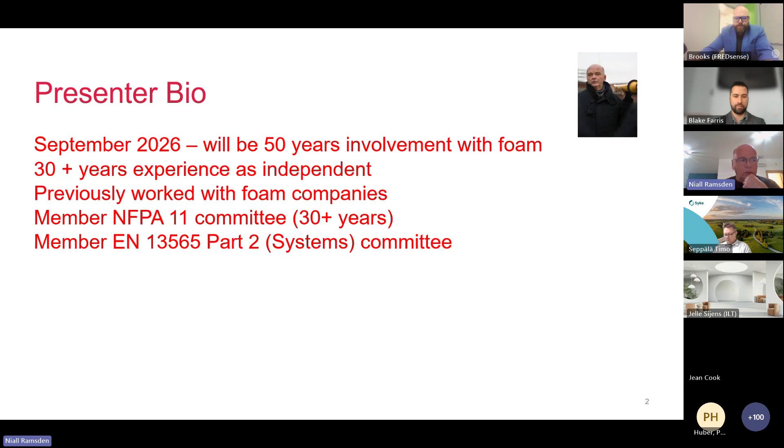One of the things I'm involved with right now is the NFPA Research Foundation Transition Roadmap. It's a working group of 4 people with help from other people sometimes as well, developing a transition roadmap guidance mainly aimed at municipal fire brigades. That's an ongoing thing, but I think we're just on phase 3, updating that as well.

One of the main issues though is a project called LASTFIRE, which is a group of around 20-25 international oil companies. All the big guys are there: ExxonMobil, Shell, BP, Total, Petronas, Saudi Aramco, all of these sort of companies who work together in developing best practice in storage tank fire hazard management. The last 5 or 6 years of that project has been focused almost entirely on the transition to PFAS-free foam.

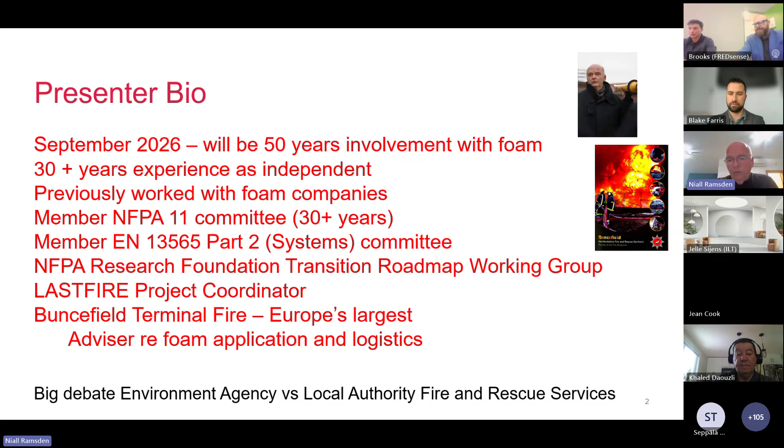It's not all just theoretical, because I was actually an advisor to one of Europe's biggest tank fires - some of you remember it, it's actually 20 years ago now, a terminal called Buncefield in the UK, about 23 tanks more or less simultaneously ignited, and I was very heavily involved there on the foam application and logistics. Interestingly enough, it was at that time this issue was just arising, and a lot of 3M foam was donated to the incident - people were glad to get rid of it. There was actually a big debate at the time between the Environment Agency in the UK and the local authority fire and rescue services who were tackling the fire, about whether they should actually use foam or just burn it out. In the end, it was really a political decision to use the foam, recognising that the public had to be made aware that you could actually manage such incidents.

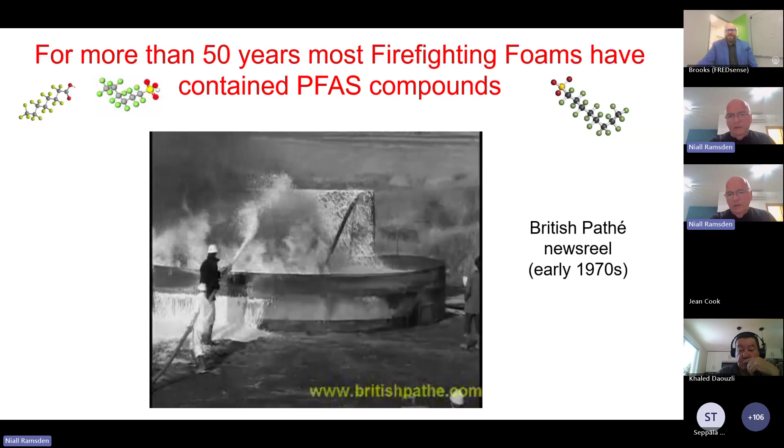So I'll show you this little Pathé News video from the 70s. This was probably one of the first introductions of PFAS containing foam in the early 70s.

I wasn't actually at that demonstration, but I do recognise some of the people in it. It was actually done by Angus Fire, and I recognise my boss a few years later from that incident. So it was from that demonstration - one of the first demonstrations, and it wasn't AFFF, as it's called. It's actually fluoroprotein foam. Sometimes we forget that PFAS compounds are used in more than just aqueous film-forming foam.

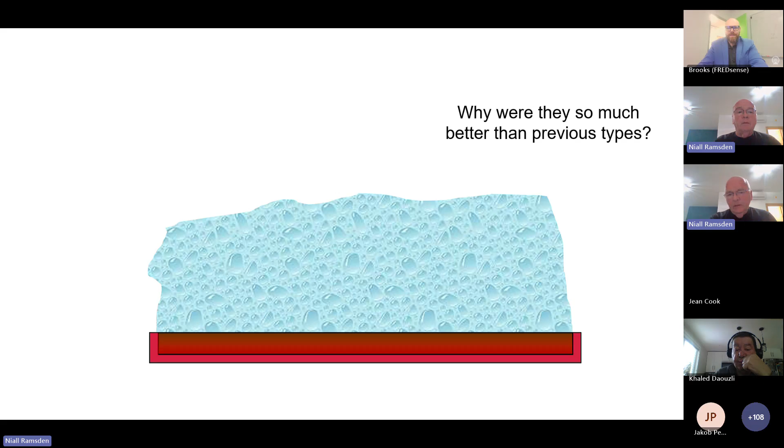So why were the new foams so much better than the previous types? Well, the big issue about them was that the previous types, which mainly relied on a protein source for their manufacture, had no fuel tolerance whatsoever. So if you mixed up the foam with fuel, basically it just disappeared and the fire restarted. So it's very important to apply these foams very gently. So that was a main issue.

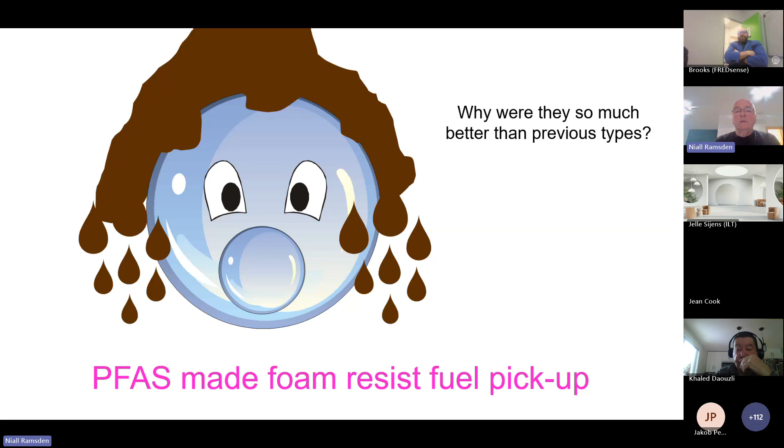PFAS compounds made these foams fuel resistant, and actually it's a protein-based foam that was the first PFAS containing foam, called a fluoroprotein foam. The PFAS compounds also made the foam much more flowable, so it helped it go around hot objects and seal against them in the middle of a fire. So they had big advantages.

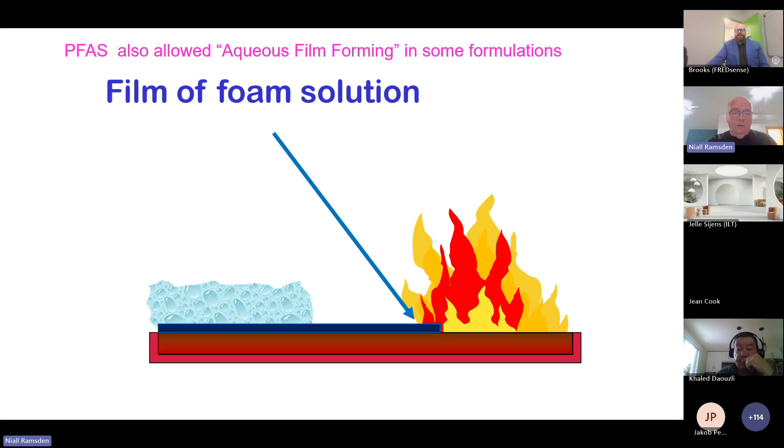They also managed in certain foam concentrates to cause an aqueous film, as it's called. So this is really not water, it's foam solution - that's the foam concentrate you buy mixed with water to make foam solution. It made a very thin film of foam solution float on the fuel under certain circumstances, depending on the surface tension of the fuel, the surface tension of the foam solution, and the interfacial tension. That thin aqueous film of foam solution gave very, very fast knockdown in certain circumstances.

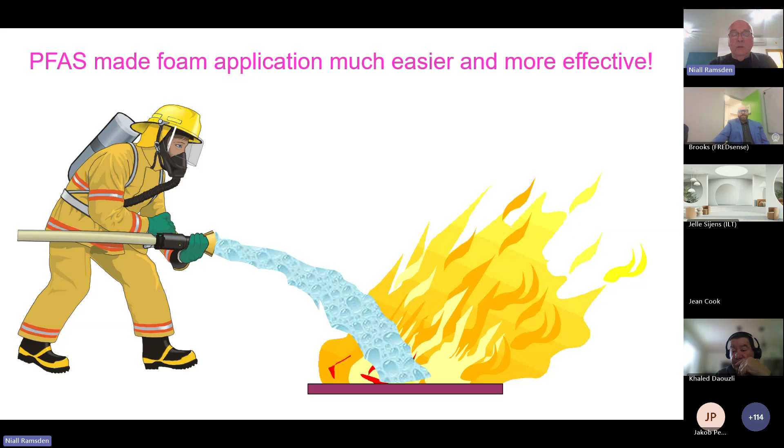Not all of them - it was very well marketed by some companies as if it's the answer to absolutely everything, but there were some problems associated with that foam as well. But it undoubtedly became the industry norm. And the main one, although I've already mentioned fluoroprotein foams, the main types are aqueous film-forming foam, hence AFFF. So essentially, these PFAS compounds made foam application much easier and more effective. It made it incredibly easier for a firefighter because of their fuel tolerance - they could actually get away with bad application in many circumstances.

So the first question anybody who is responsible for emergency response would ask when you said, okay, we can't use PFAS containing foams - do the new types work? Can you make them work? Now, let's not forget, those of us who have been in the industry a long time, there used to be foams that didn't contain PFAS and they were made to work. So we shouldn't forget that. So really, straight away, we should know the answer is yes, but we had to prove that again.

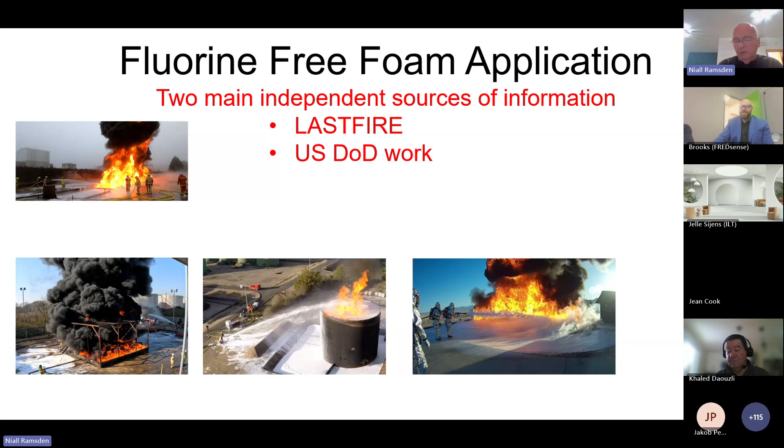There are two main independent sources of information. One is LASTFIRE, that group I just mentioned to you - a lot of different tests being done. And the other main source of information on an independent basis is the United States. Well, it's no longer DOD, of course, it's DOW work that they did.

That work is described in a lot of publications, but of course, because it's aimed at rapid rescue in aircraft crash fires, that type of thing, the concentration of the work was on Jet A type fuels and very thin, shallow spills of that type of fuel. Obviously critical to life safety, but a completely different situation from the industrial types of fire incidents that we tend to be talking about in LASTFIRE.

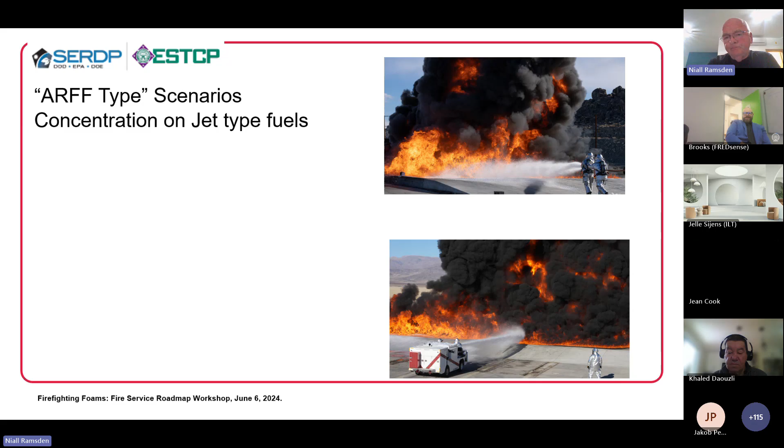So that's the sort of work that they were doing. You can see, very rapid, 2 minutes response time, very rapid application of foam. It's a life safety issue. It's not really an asset protection issue. And all that work has been published, and indeed within the Research Foundation work and webinars I've just mentioned, there are some presentations if you go online about that work.

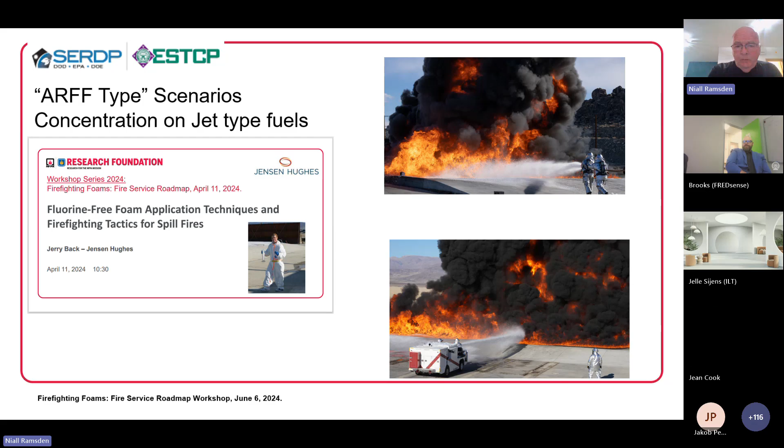The person in that picture there is a guy called Jerry Back, one of the colleagues on the NFPA Research Foundation working group. He made the comment, legacy foam application techniques work fine with the new foams. However, we haven't taught them for years. The AFFFs and the fluoroproteins made firefighting much, much easier, and maybe made us a little bit lazy about training to do the job properly, applying the foams very gently. So that's the US Department of War work.

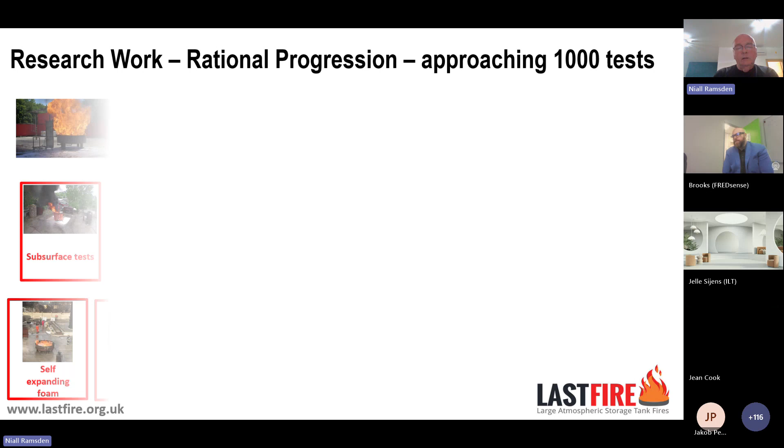LASTFIRE has done probably nearly 1,000 experiments now, ranging from just a 2.4 meter diameter tank up there in the top left, which is a standard test, been around for about 20 years. It's a test to assess the capability of a foam to work for the special circumstances of a tank fire. In fact, right now I'm in Hungary doing a few more tests with some new firefighting foam concentrates, ones that are being developed for use at a very low concentration, only about 1%. So this work is ongoing.

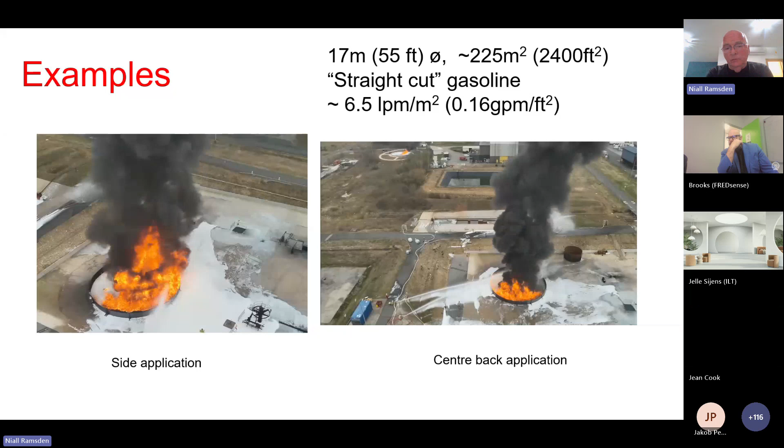But we've done an awful lot of tests, different application techniques, different fuels, different fire scenarios, you name it, we've done them. Just to give you a couple of examples, these are, I think, 17, 18 meter diameter tanks. These are obviously speeded up, I think, about 4 times. This is some work we did in France. We've done work in Saudi, France, Hungary now, Spain, all sorts of different countries and different locations.

This particular piece of work was trying to assess what's the best application technique for a tank fire. Was it best to apply the foam at the side of the tank, or was it best to sort of fire it across at 12 o'clock in the middle of the tank? So that's that sort of work.

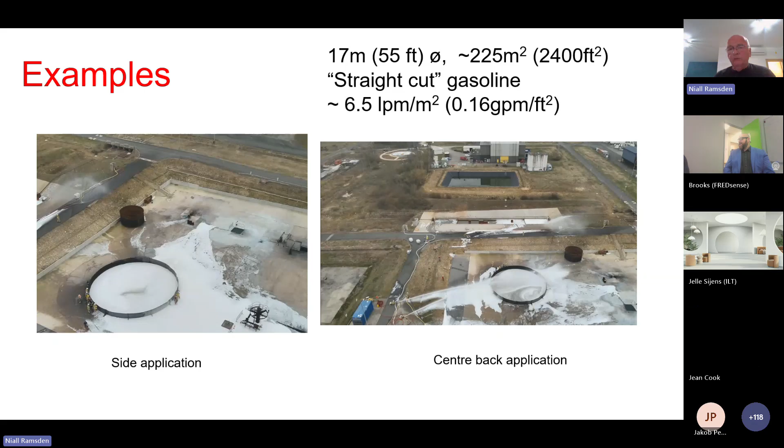In fact, if you look in the background there, this pit here is actually 50 meters long by 6 meters, and we built that in conjunction with a facility that's LASTFIRE. And we actually proved here that these PFAS-free foams were traveling 50 meters. Now, if you read the standards, they say foams can only travel 30 meters under their own momentum. So you can see we're actually doing a lot of work that really maybe we should have been doing before, but nobody ever bothered because it's too easy almost to use PFAS-containing foam.

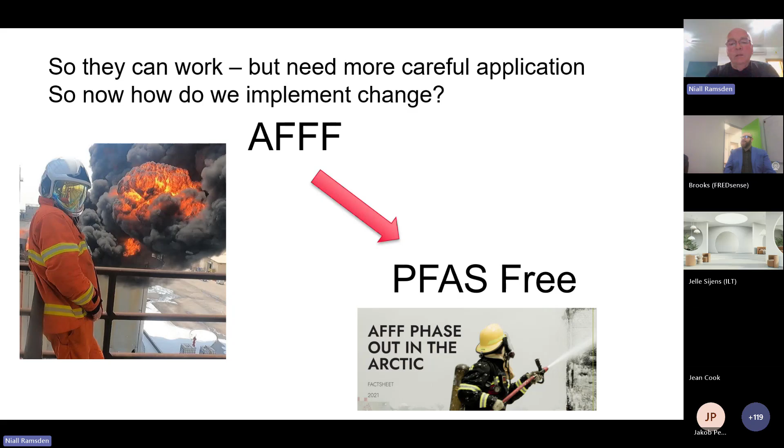The next stage is how do we implement change from AFFF to PFAS-free foams? And that's really where the Arctic Council phase-out program, the associated transition manual that was developed and training modules come in. Now, okay, it's the Arctic Council that did the work, but realistically, that work applies to every single application of foam, whether it's for a local authority, municipal brigade, or a large industrial brigade. The principles described in that document are applicable to every single incident.

The key objectives were to develop cost-effective, and at the end of the day, everything has to be cost-effective, and appropriate recommendations for the removal of PFAS-containing foams for all applications within the Arctic region. And this is important, without jeopardizing risk reduction, especially, of course, in the aviation industry, rapid rescue situations, that type of thing. And as I pointed out, although we've specified the Arctic region there, in reality, the work applies to every single foam application in the world.

And the other point was to address at the time legacy issues. So in other words, you weren't using any more. So it started introducing interim measures, which several countries have already adopted, of course. You can't use these foams, the old foams, for testing or training, that type of thing. It's a very, very pragmatic approach.

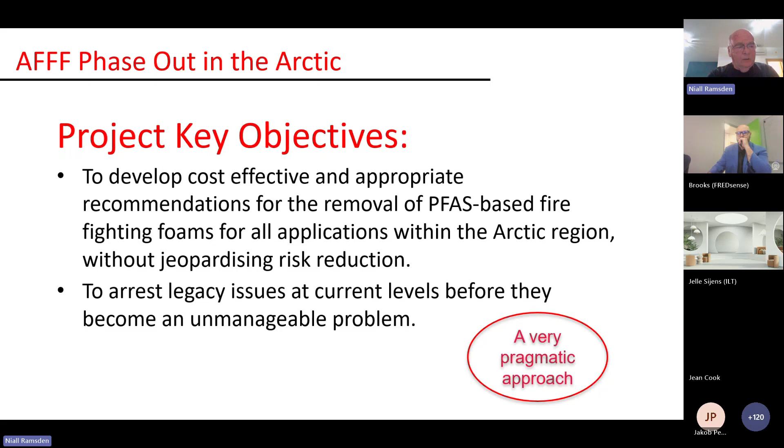We'd quite like to see. We can be very theoretical and academic about this, demanding all sorts of things. But ultimately, these foams had to be used by practical people. So it's important to make sure that the process is practical. The transition process itself is described in the manual.

If you actually look at the manual, it looks very daunting to begin with, because there's a protocol for every single aspect of this transition. But once you get it down to the ones that you need, then it becomes a very workable solution. First step is always, hey, do we really need foam? And if we're honest about it, there's probably quite a lot of places where, well, does the risk really justify the expenditure of that foam system?

I can name places, no end of facilities where if you look closely, you think, well, why have you put foam in there? Just because it seemed like a good idea, or it's easy to put something in, but they know the risk doesn't justify it.

Having decided you're going to go ahead, yes, the next step is obviously to identify those systems that do need that transition and identify the site-specific or system-specific or application-specific modifications required, followed by procuring new foam and equipment, and then, of course, cleaning out equipment from the old stuff, whether it's storage tanks, pipe work, application equipment, wherever.

Installing and commissioning the new equipment, and finally, something that the industry has been very bad at, whatever foam they've been using, make sure that on an ongoing basis there's proper assurance to make sure those systems will continue to work. We have not been good at that, if we're honest. We really haven't.

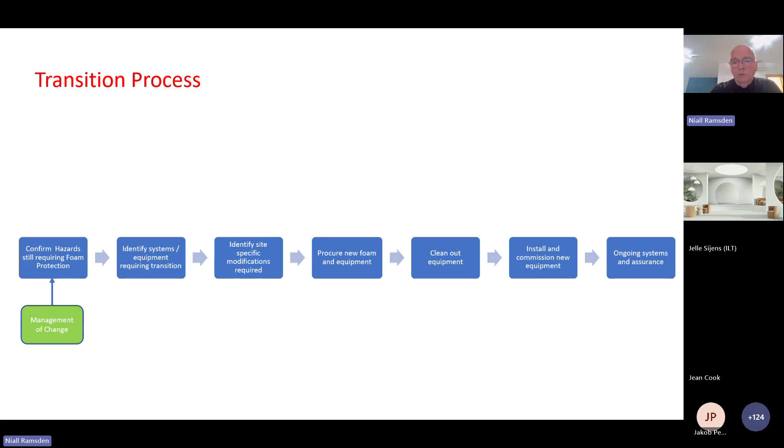For every section of this, there are different protocols explaining what it means and how you can do it. And of course, everybody has to do this under something like a management of change to show that even during the process, you're not risking risk reduction. So you need a proper fire risk assessment to begin with. Then when you get to identifying what you need to do, you develop the applicable protocols.

And I said I don't know, I've never counted them, but there must be 50 or 60 different protocols in the document. So if you want to clean out a foam chamber, a device that pours foam onto a storage tank, it describes that process.

Then, of course, you've got to specify the replacement equipment in detail, and it's a very good opportunity to do a proper procurement specification. Too often in the past, people didn't put a performance-based specification together. They just asked the supplier, please supply me some foam. Well, that's not good enough. Every application has special characteristics that require special characteristics from the foam concentrate.

Then, of course, cleaning out the equipment and disposal of the equipment and the liquids, as Patrick just mentioned, and there's good news, there's more and more techniques becoming available, making them more competitive and practical as well.

And then, of course, commission new equipment, and then make sure that the assurance procedures are in place, site-specific emergency response procedures are in place, and most importantly, the training, because these new foams do need proper training using real fuels at proper training grounds. And of course, during all of that time, you've got to have interim risk management as well. So all of that is described in the transition manual.

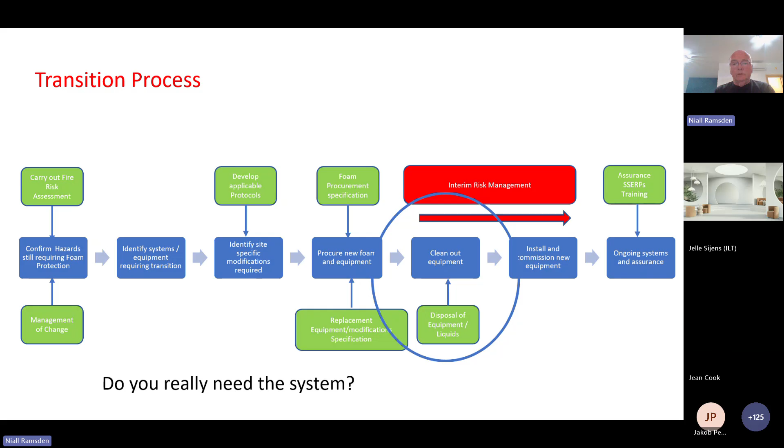Right now, today, of course, we're going to concentrate on some of the work done by my colleagues on this webinar, case history of cleaning out that equipment. So we're in that phase. Just to mention, though, that the document also includes some training modules about how to use the foam, the background of the situation, some of the protocols, that type of thing. So it's a very comprehensive document.

So that's where this comes in. And I'm very proud to have been involved with it, working with Timo and his colleagues. But I would say it's a very comprehensive transition guidance, and the training modules are very valuable as well. And to make the point again, it's applicable to all sectors, whether it's municipal, aviation, or industrial.

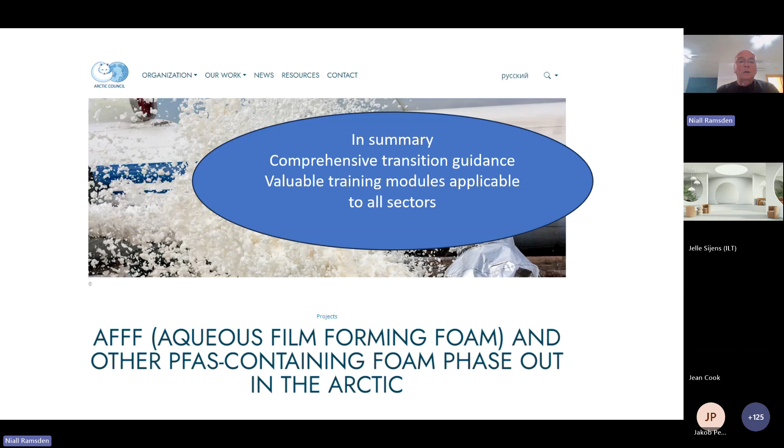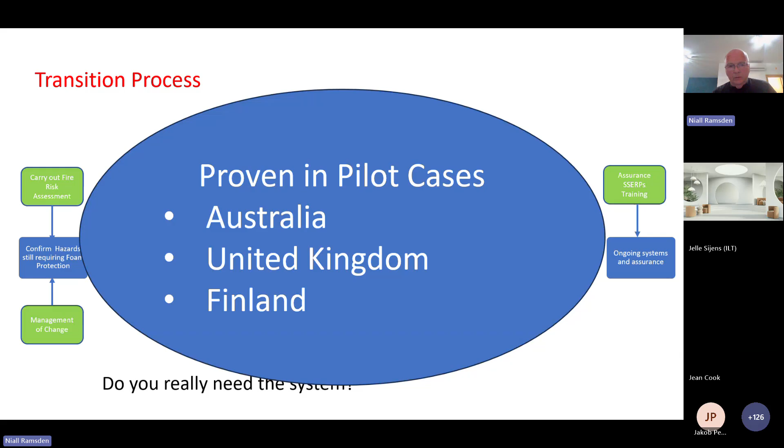Just to make another point, this manual's been out there for a few years now, but it has been proven in pilot cases. Personally, I've worked on ones in Australia, the United Kingdom, and other countries. And of course, today we're going to hear about some pilot cases carried out in Finland. So what I would say about this whole situation is that this is actually an opportunity to do things properly, because maybe we haven't been doing things properly with foam systems in the past. So it should be seen as an opportunity, not a crisis.

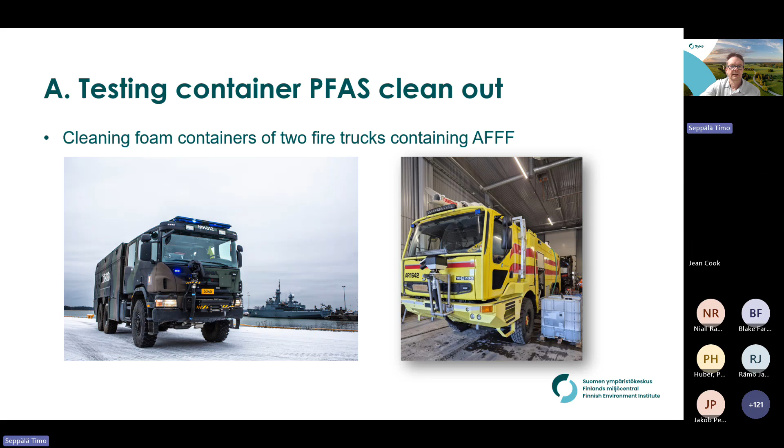And the second part of it is very much related to the Arctic conditions, because we wanted to know at which point on-site wastewater treatment would become feasible, because large quantities of PFAS-containing wastewaters are formed during this cleaning process, and regularly we would be taking that water to high temperature incineration in Finland. But in the Arctic, we know by experience, especially in the most remote Arctic territories, that transport distances are so high that this might not be possible.

It's true that some of these wastewaters formed in this process had to be treated otherwise anyway, because they would contain solvents or anything. But the big question is really, can this overall volume be made smaller? And perhaps most interestingly, there's been a lot of academic and other studies made of these cleanup processes, but we didn't really have an answer to the question: once we actually treat this water, could it be released to the municipal sewer system or even to the environment? Because this would be the case in some remote regions, and what limits for this release should be used.

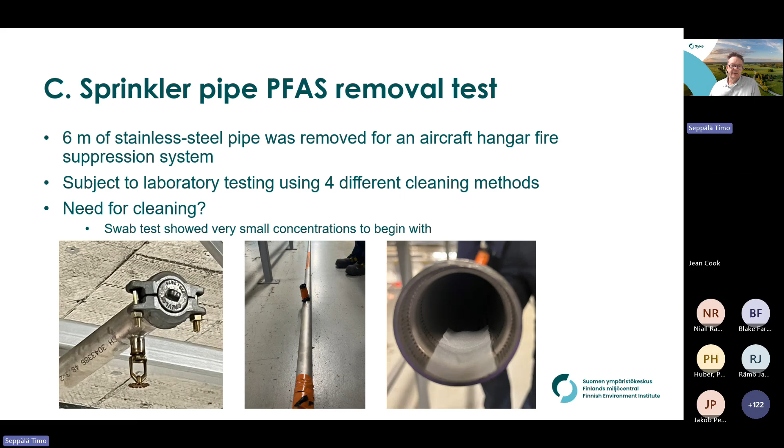And the fact is that because these pipes do not contain foam all the time, and they are rinsed after testing, the concentrations that we were able to analyze from the internal surfaces of this pipe in the swab test were relatively small. So we weren't really hopeful that the tests we were going to run with the pipe would show huge removal rates. And of course, there have been a lot of academic and other studies on what techniques you should be using with these pipes. But as I said, this was sort of an additional part of this.

And then, of course, one of the things that we were really interested in was this question: if I was the authority in charge of trying to figure out whether this system has been cleaned in accordance with the best available techniques, what would I need?

What could the company or the consultant, whoever was working on this, give us? So we took quite a few samples from different parts of this project, and different analytical methods were used. First of all, we had these surface sampling systems, for example for the internal surfaces of both the tank as well as the sprinkler pipe. And we analyzed the target PFASs and also total oxidizable precursor assays. And then we partnered with FREDSense, who has been developing this rapid analysis technique in Canada, and Blake will give a presentation on that later on.

So the question has been around in all of the foam cleanup webinars and meetings: what do you need to prove that the system is clean? And another question is, what sort of measurements are actually available? And of course, regulations matter. In the EU, we have both the REACH regulation, the new PFAS foam restriction, as well as the POPs regulation restrictions, for which this guidance for transitioning and really interpreting what this legal definition in accordance with the best available techniques could mean.

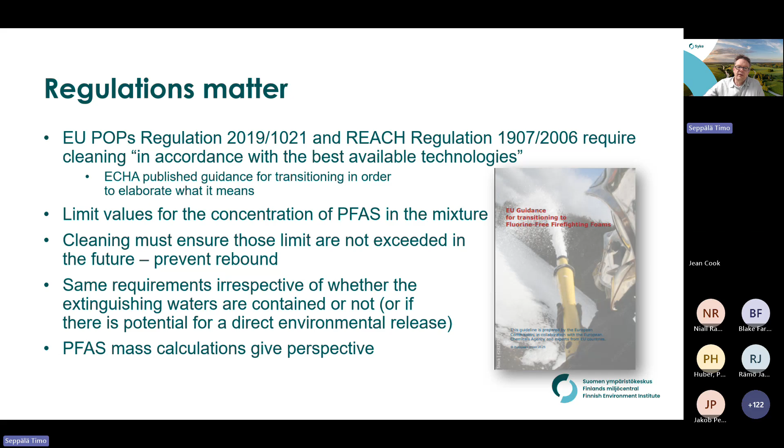And then we also wanted to calculate these PFAS masses, like how much PFAS we actually have remaining in the system, because that gives us another perspective on these concentrations. And with this, I will finish my introduction, and I will give the floor to Jaakko, who will run you through the fire truck cleaning process. Go ahead, Jaakko.

Thank you, Timo. First, I share my screen. Okay, now can you see it well? Okay. Yes, we can see. Yeah. Okay, good. So hi all of you.

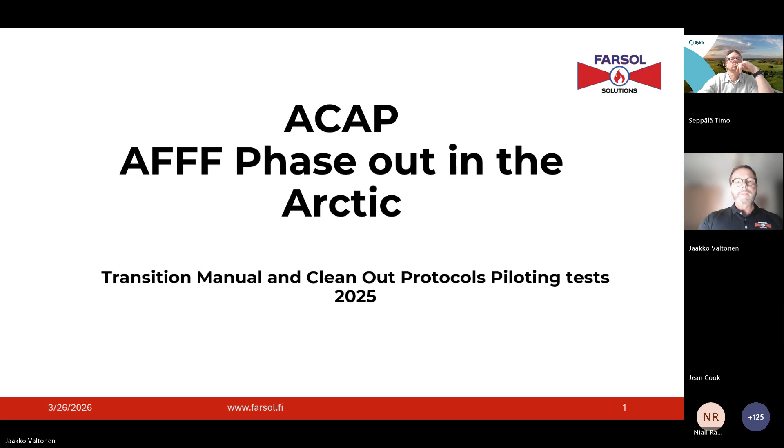My name is Jaakko Valtonen, and my presentation is about this Arctic Council transition manual and clean out protocols piloting test work that we did last year. Three years ago, I retired and founded my company Farsol, and now I work as an independent fire protection consultant. Before that, I worked in different municipal and high hazard industry emergency management roles as a firefighter, as an incident commander, as a deputy chief fire officer, and lately as a corporate advisor in terms of fire and explosion hazard management.

During that time, when I was in emergency response and the fire brigade, I used a lot of foams. We used a lot of foams over decades, in flammable liquid fires and trainings. At that time, we still had the chance to train a lot with foams and also with testing. So I'm guilty of spreading PFAS in the environment, but my excuse is that we didn't know the issues at that time.

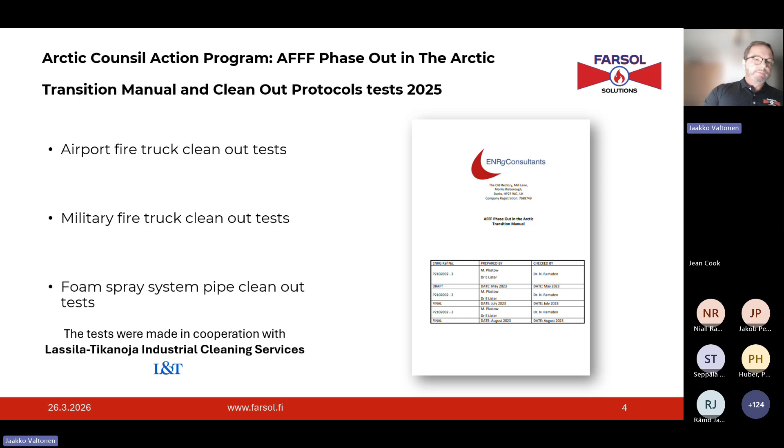So first will be the airport fire truck cleanout tests, then the military fire truck cleanout tests, and finally the foam spray system pipe cleanout tests. This airport truck foam tank capacity was 1,300 liters, and it was made from glass fiber polyester. And the concentrate inside was Sthamex AFFF foam concentrate with high PFAS levels in it.

And we used the Arctic Council vehicle cleanout protocol, and basically the one cleanout cycle was that we filled the foam tank with fresh warm water. This time the water temperature was 50 degrees Celsius, and it stayed inside for 30 minutes. And then next we drain out the water, then high pressure jet wash the foam tank, and then the cleanout protocol states that if there's still some foaming or the drained material doesn't meet the PFAS limit, then the cleanout cycle should be repeated.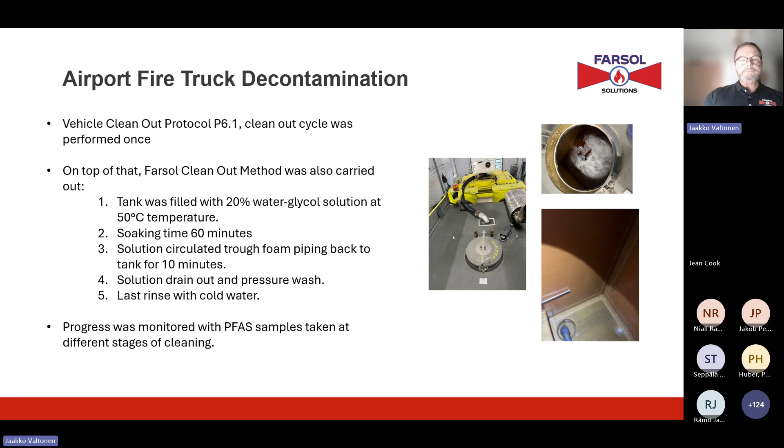So we took samples from this first clean-out round. We took 2 surface swab samples and 2 liquid samples. So 1 surface swab sample in the very beginning of the clean-out process, and then first liquid sample after we have filled the tank with warm water, and then surface swab sample after pressure wash, and then also liquid sample after pressure wash. And then 2 additional samples after this second clean out round with water glycol solution.

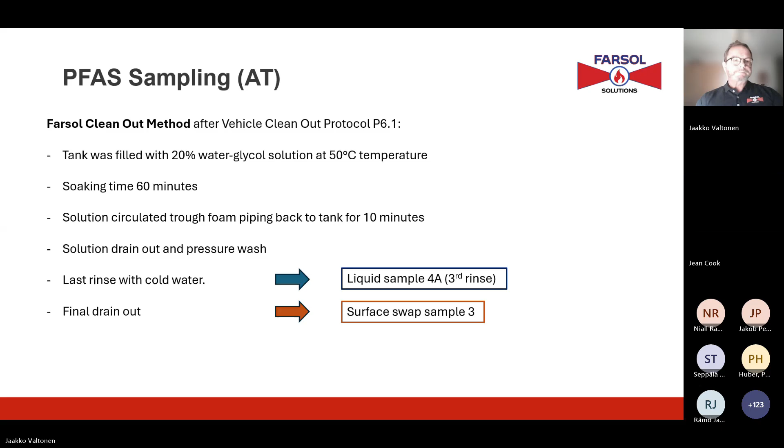For sampling, we used 3 times 100 milliliter bottles, and for surface swab samples we used IPA moistened sample cloths, and the surface swab area was 100 square centimeters, as seen here. The Eurofins food and feed testing laboratory in Sweden did the analysis with these methods mentioned. You can see here the methods of target and TOP assay analysis.

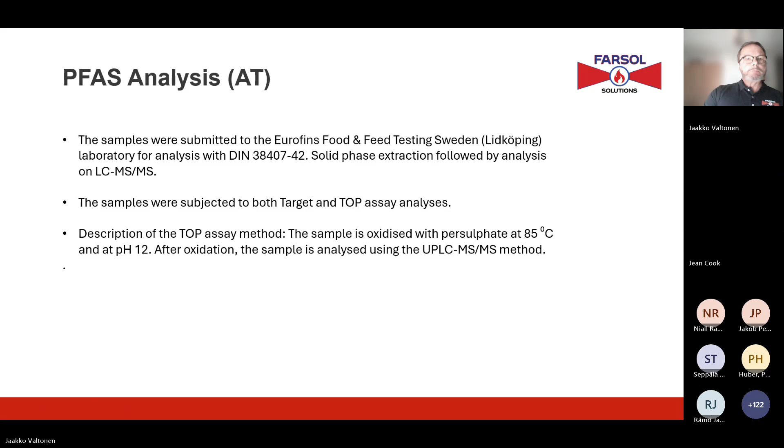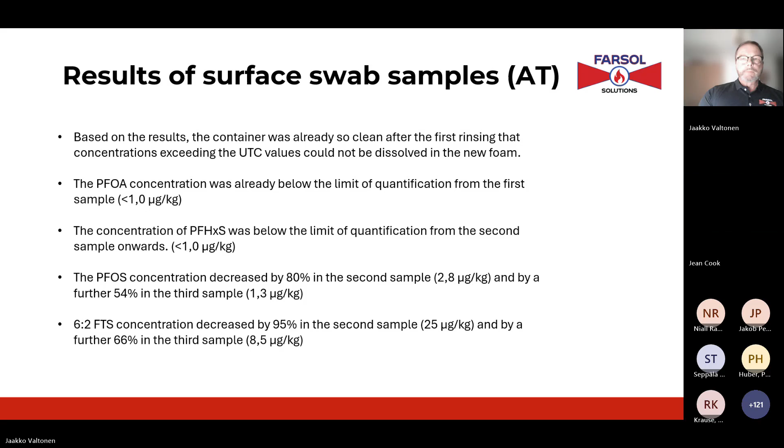So here we can see the reduction of PFOS from sample 1 to sample 2 was already 80%. And the 6:2 FTS level from sample 1 to sample 2, 94.9%. And also more reduction was achieved from the second sample to the third sample. So still 54% reduction in PFOS and 66% reduction in 6:2 FTS.

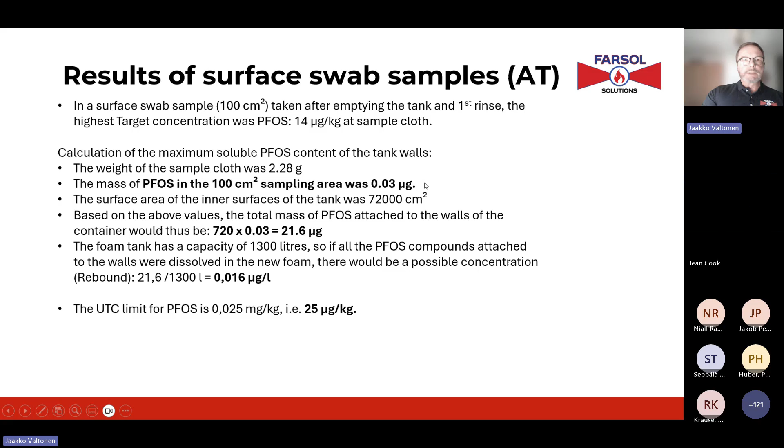So what we did was that one washing cycle included warm water fill, drain out, high pressure wash, and sample. This cycle should be repeated so many times that an adequate level of purity is achieved. Based on the surface swab samples, the tank would have been sufficiently cleaned out already after the first clean out cycle.

But when we continued with the glycol solution, the PFAS levels were further decreased up to 66% with the 6:2 FTS.

So we could say that repeating the washing cycles and using glycol or other appropriate solvent would enhance purification and cleaning results, but other things like cost effectiveness and overall appropriateness should be considered on a case by case basis. This point is highlighted also in the clean out protocol.

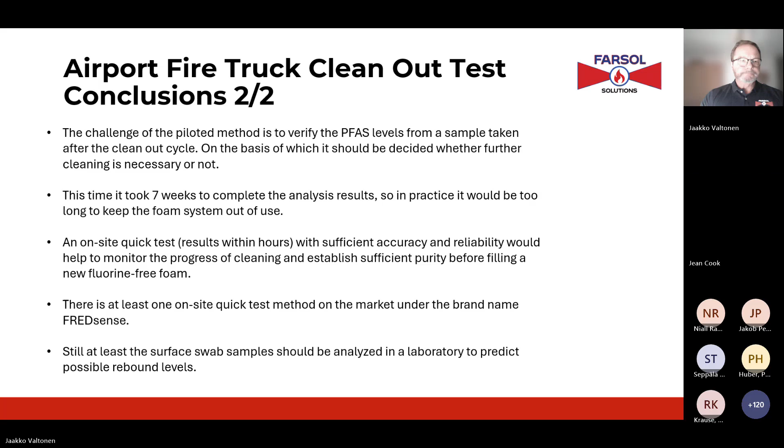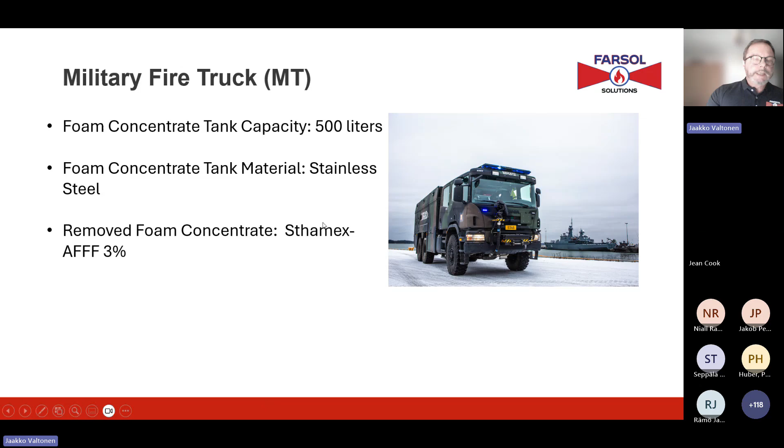And then the military truck clean out tests. Now we had a smaller foam tank and the tank material was different, it was stainless steel. And again, the removed foam concentrate was AFFF foam with high PFAS levels. This time the water temperature was 30 degrees Celsius for 30 minutes.

Then we did this clean out cycle: we drained the water out, then the high pressure jet washed the internals of the tank, and we repeated this cycle 3 times. The first sample was taken right after the foam concentrate was drained out, and then we took a liquid sample after each clean out cycle, so 3 samples altogether.

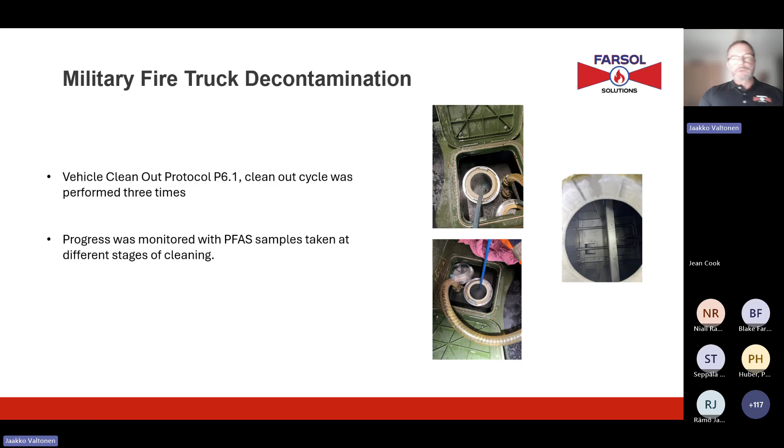We took the last swab sample after the last rinse. We took only 2 swab samples because the area to take the sample was very limited, since we only had this little opening on top of the tank. We had to take the surface sample around this opening and from the top of the tank, so we only took the sample at the very beginning, and then after the clean out process.

Yes, we used the same sampling method and same analysis. Again, in the first sample, the 6:2 FTAB and Capstone B concentrations were so high that it was not possible to determine other individual PFAS levels. Only 6:2 FTS could be measured, and that's why we only have FTS levels here in this diagram.

In the second sample, we got the measure from PFHxA at 12 nanograms per liter, and other concentrations were already below the limit of quantification, so below 10 nanograms per liter. But here we can see a good reduction of 6:2 FTS levels from the first sample to the third sample.

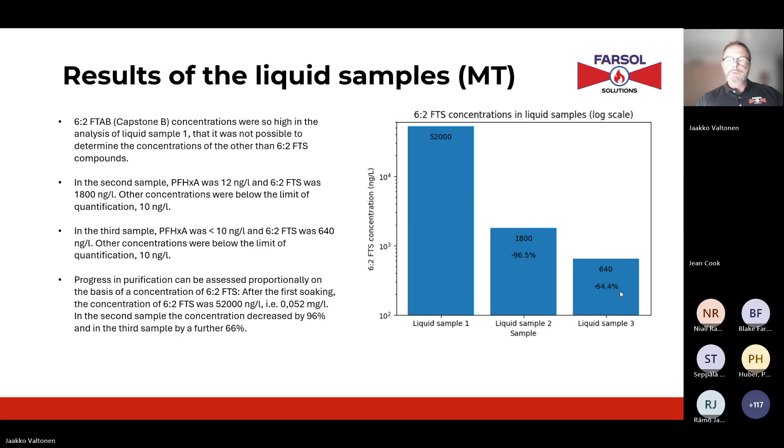And then the results of those 2 swab samples. As mentioned, we should keep in mind that the samples were taken only from the rooftop, where the foam concentrate has not been in continuous contact. But anyway, we got results that showed 6:2 FTAB reduction of 65%, FTS reduction of 70%, and also PFAS reduction of 17%.

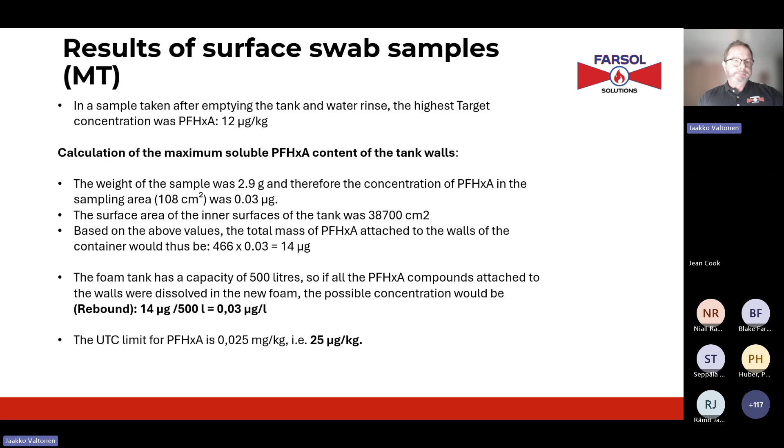Again, we calculated the maximum possible rebound level, and the result was as low as 0.03 micrograms per liter, well below the UTC level. Again, these vehicle cleanout protocol procedures were efficient and a sensible practical way to implement in practice. Based on the surface swab sample, the tank would have been sufficiently clean already after the first clean out cycle.

The same issue was here, that after one clean out cycle, we should have the results to make a decision to continue or not. But this time we couldn't get that result, so we just repeated the cycle 3 times and waited for the results. But as we saw from the results, we could have been stopped after the first cycle.

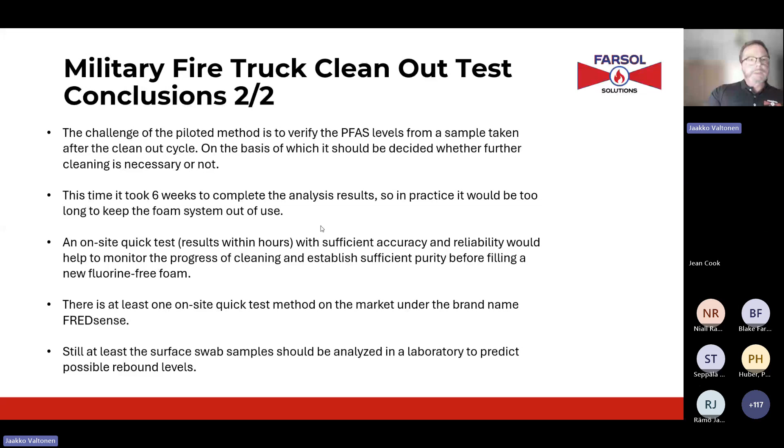Okay, Timo, do we still have time for this foam spray pipe clean out test? We are running a little late, but if you run this through quickly. Okay, that's alright, I'll try.

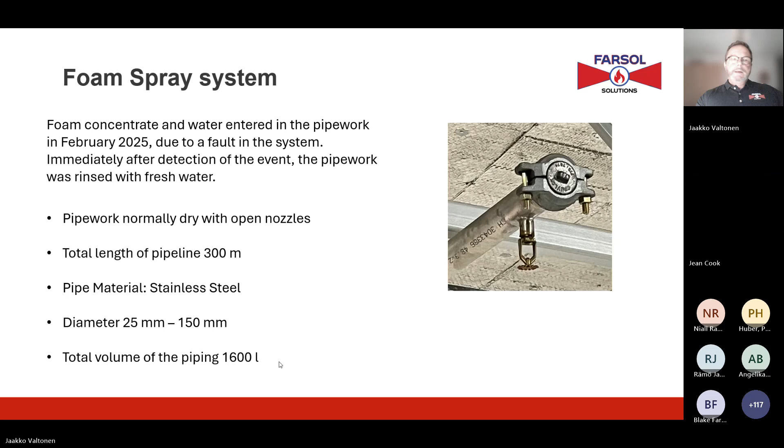So what happened was that foam concentrate and water entered the pipework in February 2025, and that was because of a fault in the system. The pipework was rinsed out with fresh water immediately after detection. The pipework is normally dry with open nozzles, total length was 300 meters, pipe material stainless steel, and total volume of pipework 1,600 liters. So we took one 6 meter long stainless steel pipe for the test, and it was cut into 400 millimeter long sections for the tests.

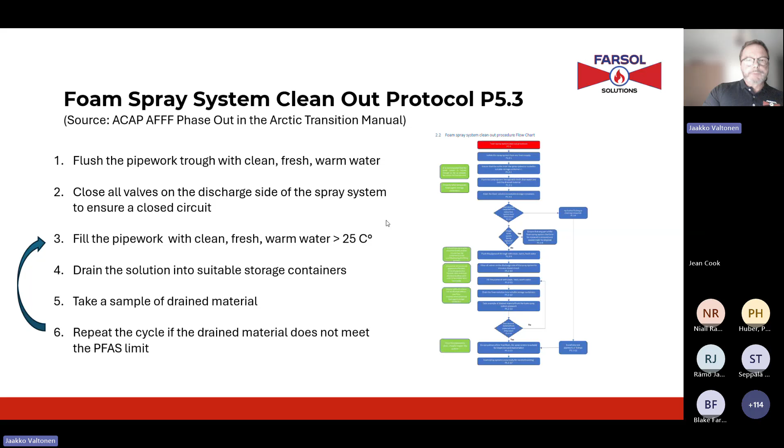This time we used the foam spray system clean out protocol. There's also a foam solution pipe clean out protocol and foam sprinkler system clean out protocol available, but basically the same. The clean out cycle is the same for all three protocols that could have been used in this test. The one clean out cycle is that the pipework will be filled with warm water over 25 degrees Celsius, drained, take a sample, repeat if necessary. But the protocol does not say how much above 25 Celsius the water temperature should be and how long it should stay in the pipework.

So what we did in the tests, we used 5 different methods and three time periods. First was soaking in water at 20 degrees Celsius for 1 hour, 4 hours, and 24 hours. Same time periods for soaking in water at 50 degrees Celsius. The third was soaking with glycol solution at 50 degrees Celsius. We didn't maintain the temperature because that wouldn't be the case in the real world when doing this. We also did a test just rinsing the pipe through with cold water, and we also used a very high pressure cleaner at 700 bar pressure.

When the soaking time was completed, the surface swab sample was taken. We also took target and TOPA samples from soaking water that remained in the measuring cylinder. Surface swab samples were also taken of tap water rinse and high pressure wash.

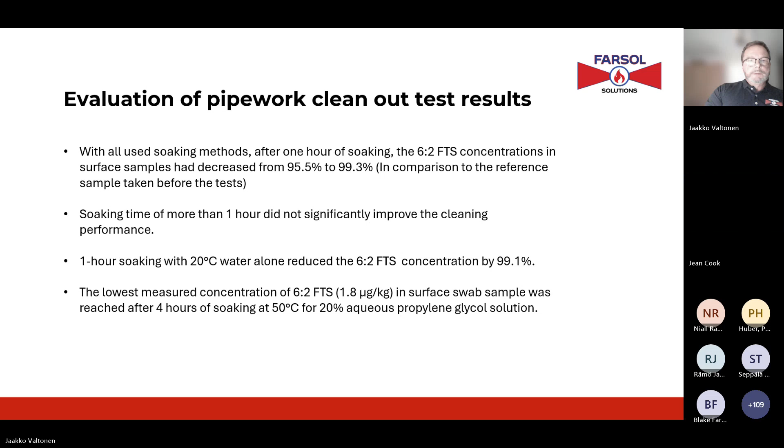So, summary of the foam spray pipe clean out tests: again, the procedure protocol was efficient and a sensible, practical way to implement. The pipework used in the test was normally dry and flushed right after the activation. Therefore, the PFAS levels were already low in the reference samples taken before the tests.

This applies actually for all the tests, and it's mentioned in the transition manual that the procedures are generic in nature and outline the steps required to clean out the equipment, but cannot be specific in terms of the actions taken, as these will be different in every installation. The intent is to use the outline guidance and develop a specific procedure for each installation, depending on the PFAS exposure and configuration of the system.

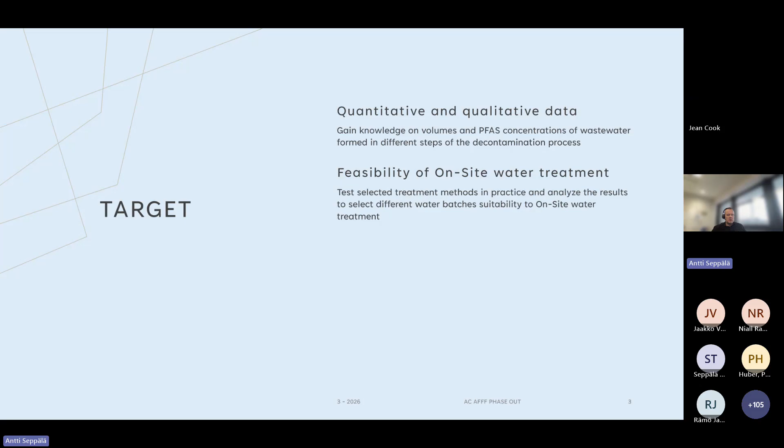Then, of course, to take a look at the regulatory limits, compare the reached effluent concentration levels to existing regulatory limits, or if there are any, having the discussion on what kind of levels can be reached and what kind of levels should be applied for this kind of activities.

And then, of course, from idea to concept, as Timo mentioned, there are faraway places where if we need to decontaminate an AFFF system, it will be quite an expensive task to transport all the waters to high temperature incineration. So these were the 4 targets that we identified.

A few words about the practical arrangement. As Jaakko and Timo already mentioned, 2 fire trucks containing concentrates were cleaned. Of course, drained first the concentrate and cleaned, using pressurized warm water and glycol water mixture.

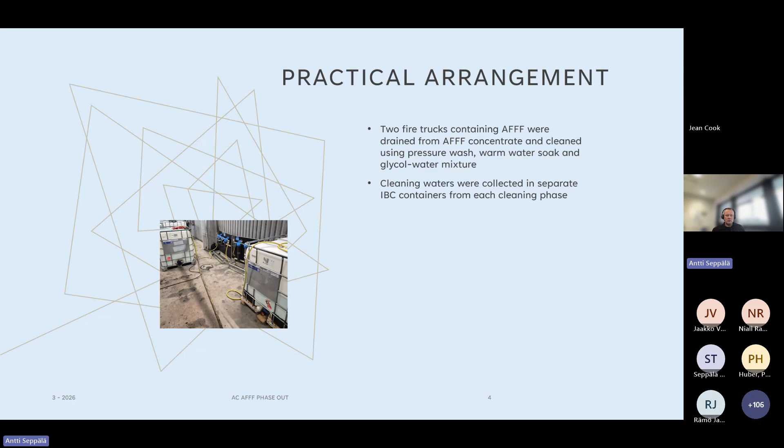Then the cleaning waters were all collected in separate IBC containers from each cleaning phase, so that we can keep them separate in order to gain specific knowledge on each step and the concentrations that end up in the water from each cleaning step.

A water sample was taken from each wastewater batch, both for target and TOP assay analysis, and then also selected parallel samples were sent to FREDsense for on-site screening test. Blake later will tell more about the results on that part.

And unfortunately, as Timo mentioned, we had some like 6 months time to do the task, but we did it in a way that we carefully planned for 4 months, and then in 2 months' time we needed to do all things in practice and get reports ready to meet the demands of the schedule. So unfortunately we didn't have the chance to analyze first and wait for the analysis data, but instead we did the treatment right away on the spot after having the actual clean out.

And then, of course, the treatment was done in order from expected lowest concentration to highest contamination. We'll see later from the results how well we managed that.

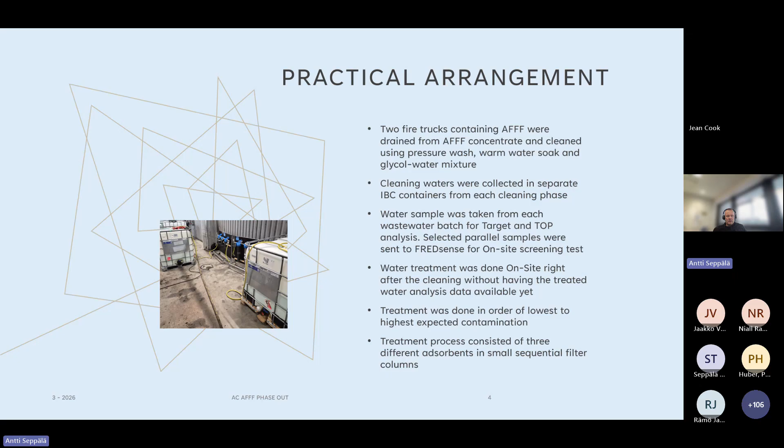There's more detailed information about the treatment process later, but it basically consisted of 3 different adsorbents in small sequential filter columns. You can see a glimpse of the filter columns on the picture on the left. Initially we had plans that we would have a bigger system and also bigger wastewater volumes, but as it turned out we were not able to get the bigger volume, so we needed also to scale down the equipment used in the practical tests.

And the test sample and the protocol, as Jaakko already explained, but this in more detail, or in relation to the actual treatment, how we worked with the samples.

So we had the 2 separate trucks, first the airport truck, and then secondly the military truck. And from the airport truck, we collected 4 different water samples: first rinse, second rinse, third rinse, and a final rinse. And then from the military truck, first rinse, and then the second and third rinse were collected together in one IBC container.

And then the treatment itself, as mentioned earlier, from lowest to highest expected influent concentration, one batch at a time. So here I try to explain: if you take batch 1, I ran it through a granulated activated carbon filter, then a specific proprietary resin, and then ion exchange. And then the same procedure was done for each batch in the order they are presented here.

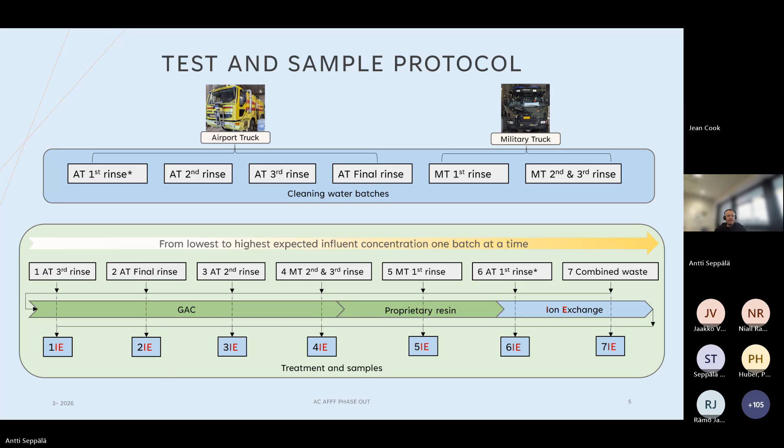In total, we took more samples than we finally analyzed, and this was because of having a limited budget. So we took 7 influent samples. They were collected from the IBC containers after mixing the contents, making sure that it's well mixed and the sample is representative.

Then we collected 1 effluent sample after each treatment step, but unfortunately we didn't have the budget to analyze all the samples. So finally we analyzed only the effluents after the final treatment step, which in this case was the ion exchange resin. And as mentioned earlier, 8 samples were also sent to FREDSense.

There were parallel samples taken from the influent or from the effluent from the same sample point at the same time. And all samples were taken in sample bottles provided by the laboratory, using, of course, powder-free nitrile gloves when taking the samples. 3 times 100 milliliters were sent to Eurofins, and 3 times 1,000 milliliters were sent to FREDSense.

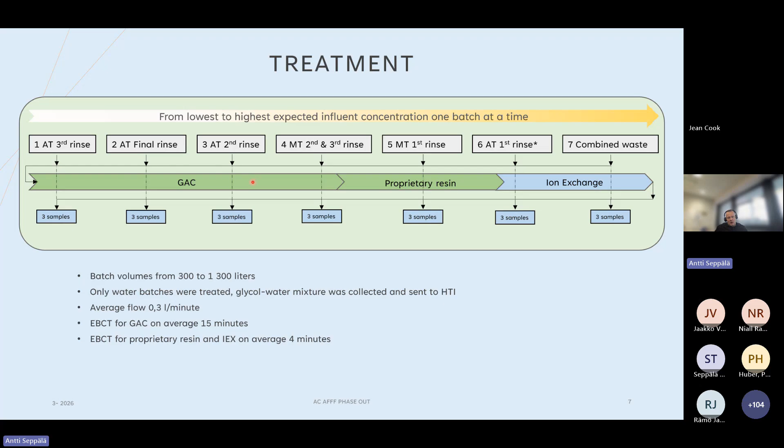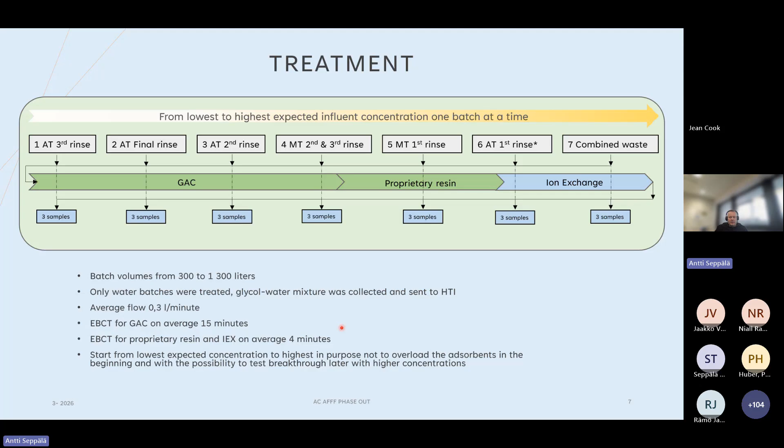So here the arrow shows the granulated activated carbon; of course, there were several columns containing carbon compared to the proprietary resin and ion exchange, to tune the whole treatment train to match the needed empty bed contact times. And as mentioned, we started from the lowest expected concentration going to the highest on purpose, not to overload the adsorbents in the very beginning, and then hopefully in the end have the possibility to test the breakthrough with higher concentrations.

A few words about the conclusions. I think we have more conclusions coming later on after all the presentations, but a few from my point of view. First of all, taking a look at the previous page, it's quite obvious that the target analysis is not sufficient to prove effluent cleanliness. So the TOPA reveals unknown precursors in effluent and influent,

and then of course it's a good question: okay, if we use oxidation as it's used in the TOPA method, what happens? So we most likely actually break down some precursors, and then we find new components. And I think Blake is already anxious to show, but he has a more detailed comparison between the analytical methods, and that actually indicates quite a lot of differences between methods and laboratories.

So a question from my point of view is, okay, what method should be used, and who to believe when defining if the system, or specifically the effluent, is clean enough. Then another question is what's clean enough? But this is one lesson learned.

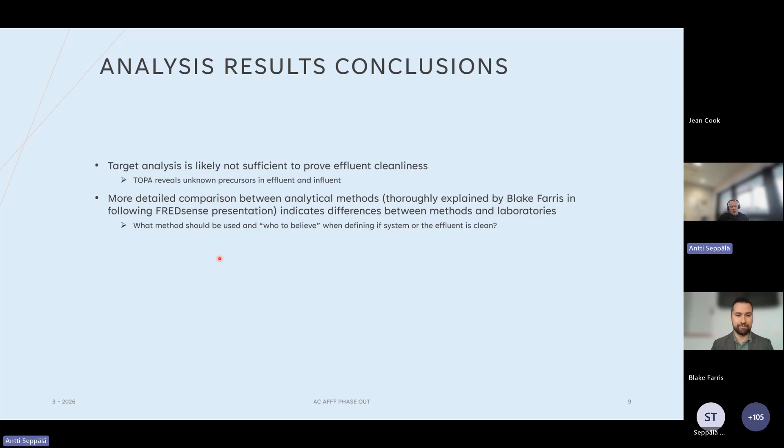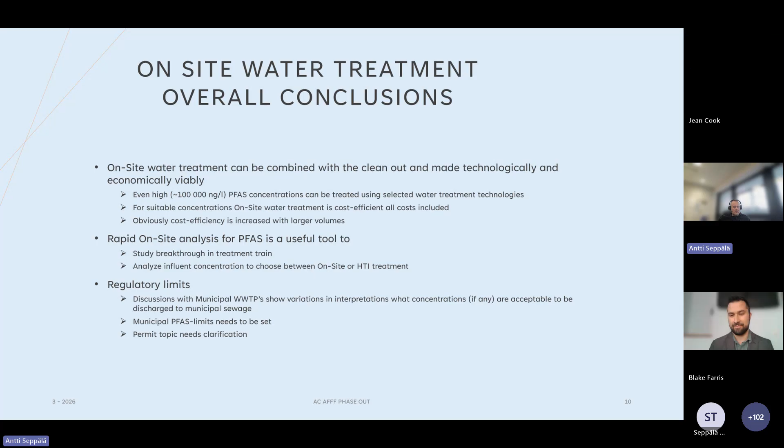I don't have the answer, but that's one big question raised during the test. That's all from my side.

Thank you. So as Timo mentioned, maybe questions then later. Yeah, thank you, Antti. And Blake is already eager to start his own presentation. So go ahead, Blake. Yeah, thanks. I'll just pull it up here. Is that visible to everyone? Does that look okay? It is.

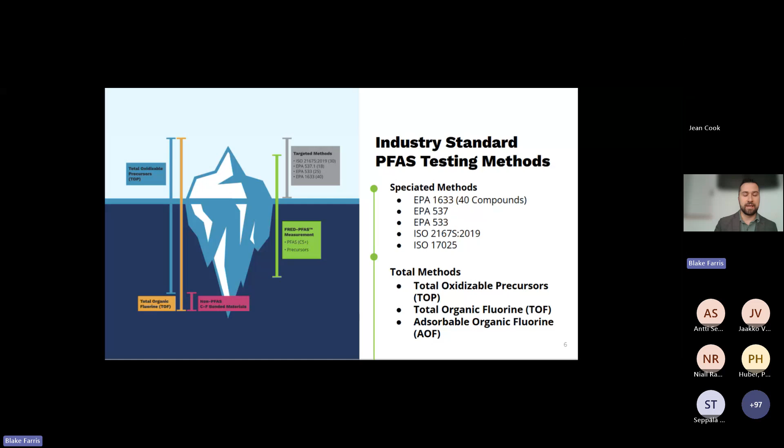And then you have the total methods. These are methods that see all the fluorine ions in your sample, or they use an additional oxidation to find some of those hard to see PFAS, those fluorotelomers, which I'll talk about more later. That allows you to see a lot more of the PFAS loading in your system. So the big question becomes, how do you pick between these methods when you're going to an AFFF site?

Picking the right method can be difficult. Both speciated and total methods have strengths and weaknesses. The speciated methods are best for risk assessment: answering what PFAS are there today, and does your process match the current regulations, particularly in North America. In the EU, you also see total methods being used as part of the regulations. It's about understanding the current PFAS load and chain lengths and fitting those into your regulatory compliance frameworks.

Speciated methods can help answer those questions, but they miss a larger slice of the PFAS problem that can be seen with total methods. They identify those hidden PFAS below the surface of the iceberg that speciated analysis traditionally misses. Total methods help you look into the future: what is your total PFAS loading, will there be surprises down the road from other fluorotelomer compounds? They also help you look deeply into your treatment effectiveness.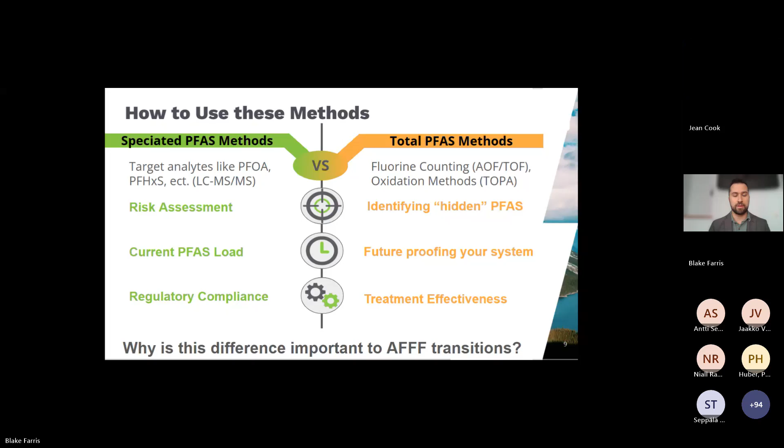So, that kind of begs the question of why is this difference between speciated and total methods really important? When you're looking at foams, the foam makers do not just use the regulated and speciated PFAS that you can see during those tests. Our team has reviewed over 50 SDSs from foam manufacturers, and every SDS that mentions PFAS has some things in common. They all have some sort of solvent in there. They all have a blend of fluorinated substances.

So this could be those PFAS that you see in a speciated analysis. It could be different PFASs. And they also have the fluorotelomer surfactants. Those are more PFASs that aren't your typical speciated analysis PFAS. So you won't see them in your speciated analysis, but over time, they will transform into regulated PFAS compounds from the environment, from interacting with temperature and soil and other things throughout the foam's life.

So that means if you're only looking at a speciated analysis, you could be missing a major portion of your PFAS loading. And that's why, in the EU, you see regulations that also look at total PFAS while using speciated as another reference point for that analysis. And so that kind of looks at that first question.

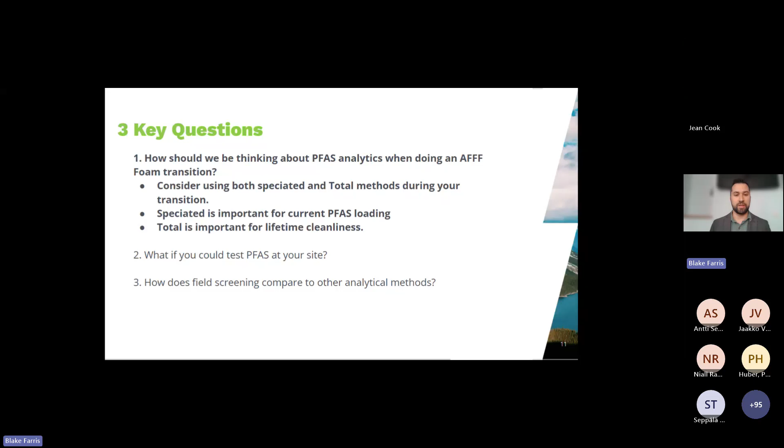So, how should we be thinking about PFAS analytics when doing an AFFF foam transition? Consider using both speciated and total methods during your transition. Speciated is important for that current PFAS loading and how regs might impact you today. Total is really important for learning the lifetime cleanliness of your system and whether that's been fully completed during your AFFF transition.

And now we'll jump into what if you could test for PFAS on your site. That's a question that we ask everyone we can. I know all the speakers here have probably heard me ask some form of this question to get an understanding. And some of the common answers that we have heard when you ask about field screening and what might change is, first of all, you can make proactive decisions in the field rather than leaving it to a judgment call. You can expedite your timelines instead of waiting weeks for results.

You just wait hours. For our AFFF cleaners, you can validate when your cleaning is below those cleaning thresholds in the rinsate. For our treatment operators, seeing when your system has breakthrough and making on-site decisions to keep your system operating smoothly. For anyone who's a site owner, an airport, or an oil and gas facility, it's really about reducing equipment downtime so that you can get an operation up and running again quickly.

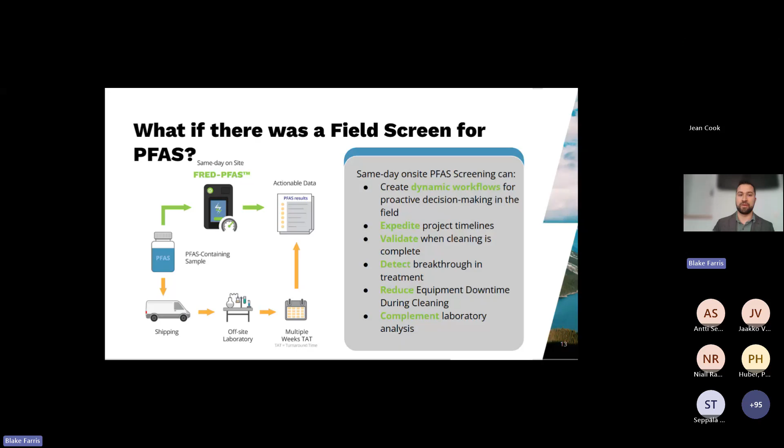That 3-week turnaround means site owners are holding their process up until they get those results and they get the okay to refill their foam systems with the new fluorine-free foams. Using on-site testing is really about complementing your laboratory analysis, not replacing it. It's so that you can feel confident when you're sending that regulatory sample that your system's clean or that your treatment system is operating efficiently, so that you don't get those surprises down the road.

So that's why we built FRED PFAS. It's really so that you can get data on your site and make your decisions with confidence. It's a briefcase-sized lab in a box that allows you to measure PFAS in a few hours. So how does it work? It's total PFAS measurement, meaning that it'll see both those fluorinated compounds, PFAS, that you're worried about from the regulations, and also those pesky fluorotelomer surfactants that don't appear until it's too late. You've already cleaned out your system and it comes back in a wave.

FRED PFAS itself measures down to 1,000 nanograms per liter of total PFAS, making it perfect for the transition process. And you get your results in 4 to 5 hours, from grabbing your sample all the way to seeing a result on our screen.

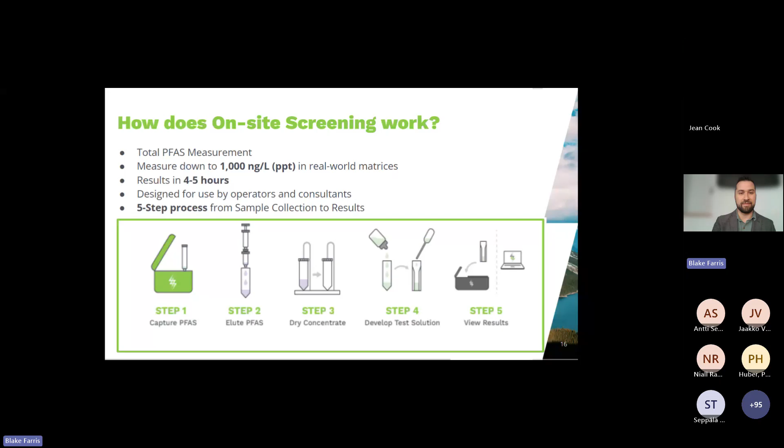And your team will follow a simple 5-step process after you collect a sample through to results. And so that's how we've built field screening and been able to bring it to site and see those results for PFAS closer to real time.

So that answers that question around, what happens if you can actually do PFAS testing at your site. So data-driven decisions, confidence in your process, and real-time adjustments all become a reality rather than a wish for those out there.

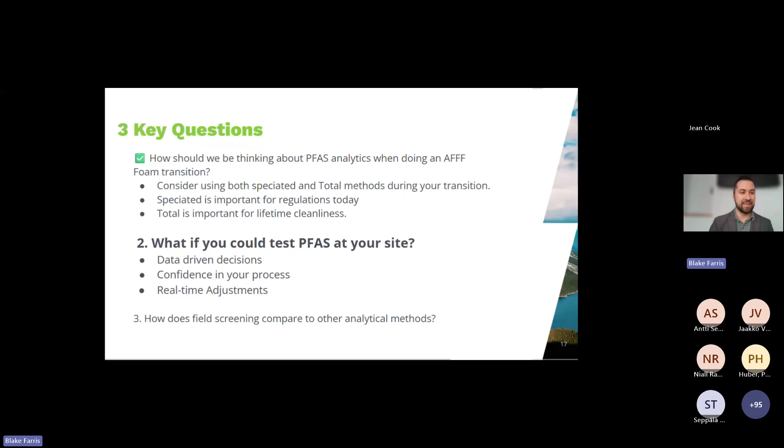And so now comes the juicy question of how does field screening actually compare to other analytical methods, the lab? Can we actually make decisions based on a tool that's on site? And so this is similar to the visual representation that you saw from Antti's presentation during the treatment process, except with the addition of the green labels for where the FREDSense samples were taken. Like Antti mentioned, we took 8 for us to then look at.

So since we weren't able to make it out to the project in time, these samples were grabbed by the on-site team and sent back to the FREDSense lab for in-house LCMS testing, both speciated and TOPA analysis, as well as running these samples on FRED PFAS. And so the samples were collected both from the cleaning process as well as the treatment process that Jaakko and Antti have already talked about.

So first we'll take a look at the rinsing samples from the tank cleaning following Jaakko's process that we saw earlier. And these are the first and second rinses from both of the trucks. So here are the results from the 4 samples. You see there's 4 columns, which represents each of the samples. In the blue, we have the speciated analysis from both labs. In the orange, we have the TOPA. And next to them is the green, which is 3 FRED PFAS runs on these same samples.

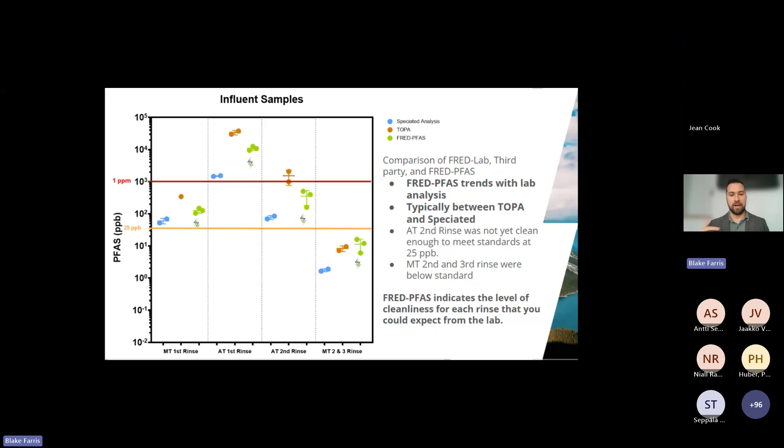So as you can see on the graphs here, FRED PFAS is trending with the lab analyses. So if they go up, FRED PFAS goes up with them. And when it goes down, FRED PFAS also goes down with them. And so it lands somewhere between the speciated and TOPA super consistently. And only for that final rinse on the right side do you see FRED PFAS match closer and higher to TOPA as we approach the detection limit of our device.

And so some of the key things that you're seeing in the data here is that for the airport truck in rinse number 2, you can see that it's not yet below that threshold limit, with the speciated, the TOPA, and FRED PFAS in that same area. And so this definitely, when you look at it, requires another clean. And Jaakko obviously did. I think he did 4 on this truck. So definitely good to keep going there.

And then the other part is that when you look at the combined military truck rinses, we see that all the FRED PFAS and lab results are below that 25 ppb threshold limit for some of the PFAS species. And that allows you to see in real time how on-site screening can help a transition project. And so when you're cleaning a truck, FRED PFAS is a great indicator of what you would see from the lab.

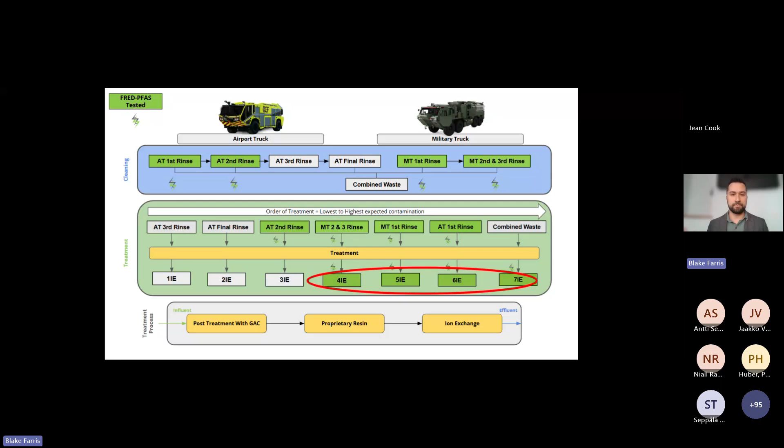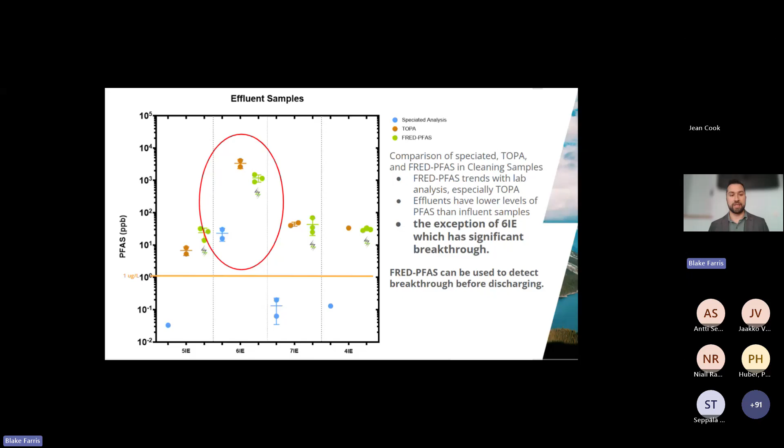And that kind of answers that last question of how does field screening compare to other analytical methods? It trends closely with the lab data, and it's trending closer to TOPA than to the speciated analysis, showing more of that total proxy than just PFOA or PFOS number. It really gives you that full picture during your AFFF transition.

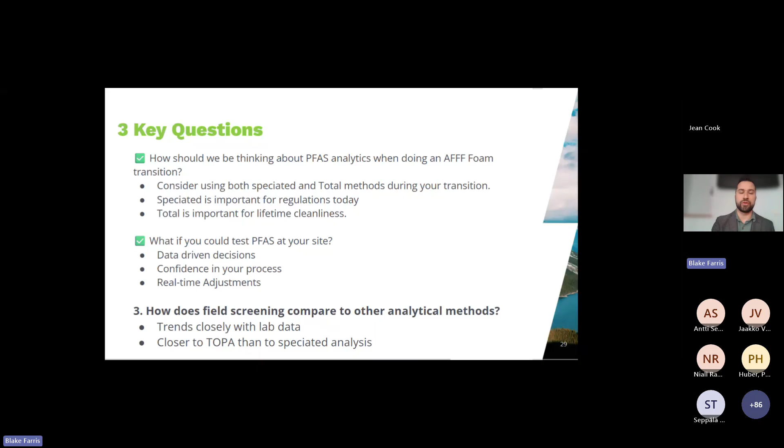So some of the lessons that we learned during this process is that in-field screening would be a useful tool during transition, whether it's breakthrough, confirming your PFAS loading before it goes into your treatment beds, or confirming the cleanliness of your AFFF trucks after the cleaning procedure.

And we also noticed that really high PFAS samples require a dilution to work in FRED PFAS. So there's an upper limit to FRED PFAS that you then need to dilute after. You can use some indicators like foaminess of the samples, rinse numbers, and sample location to help you make those dilution decisions. And then FRED PFAS is again trending closer to those TOPA results as an indicator.

So it allows you to see that future contamination from the fluorotelomers and confirm the cleanliness of the system during your AFFF transition.

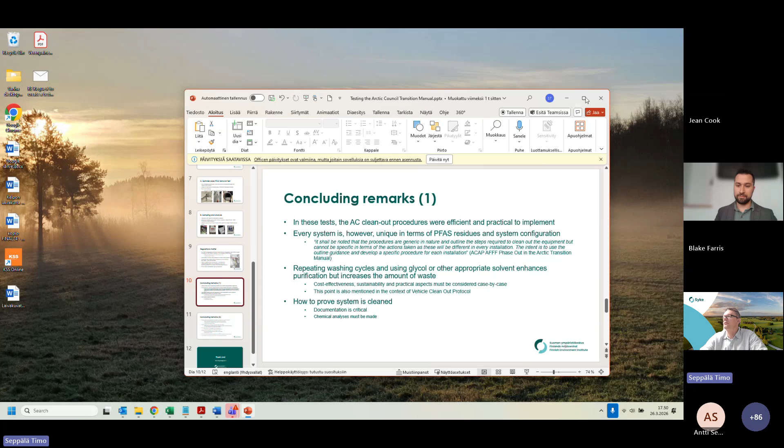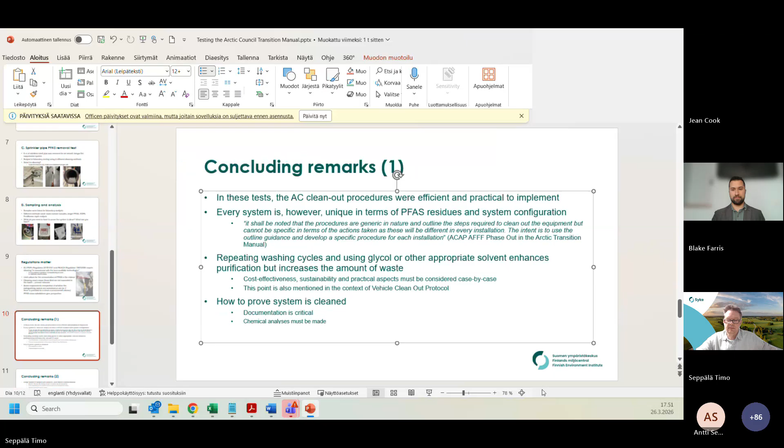So thank you, Blake, and I will now finish with... sharing the wrong screen. But now you should be able to. All right, you should be now able to see my concluding remarks, right? Is that correct? Perfect. So in PowerPoint mode, not like, I don't know if you want to go presentation mode or not. Oh yeah, I get it. I don't know what happened. Well, this is not how I wanted to end. I'm just gonna do it the way I did it earlier. So I really wanted to just, and I want to remind you all that I'm looking at this from the point of view of enforcement authorities. Actually, although we are not technically an enforcement authority, but right, now you should be seeing it. No. Well, I don't worry about it.

So just to conclude, I think what this test did was convince us that these clean-out procedures that were presented in the guidance were efficient. And again, it's stressed that each system is different, so you really have to tailor the approach every time. One thing that was also obvious is that when you repeat the wash cycles or use glycol or other appropriate solvents, it improves the purification, but then it also gives you a bigger amount of waste. So this is something that you have to balance with.

And the big question, as I think we also saw in the comments already, was how do you prove that the system is cleaned? First of all, the documentation is critical, because that is how you prove it to the enforcement authorities that this is what we have done, and we can't see how this could be done without chemical analysis. In this project, we were able to analyze quite a large number of samples. I would say that it's probably more than you would normally do in a similar project, and it was good for following how the cleaning process developed, but sometimes the results could even be contradicting. Like we had this FTAB measurement after a couple of rinses.

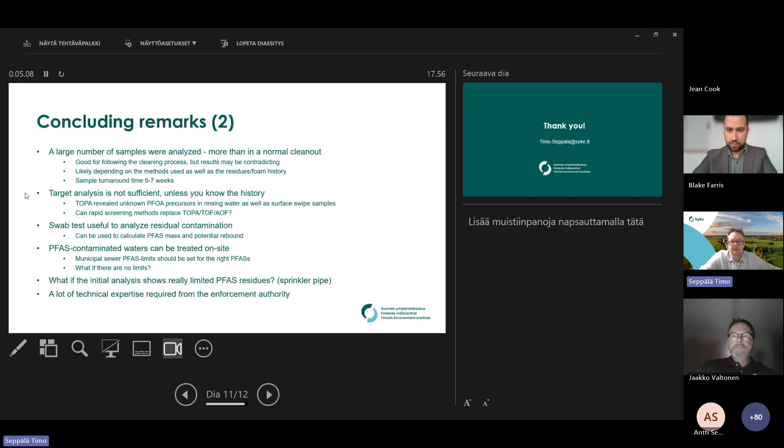So just to conclude, in our case certainly it's going to be the regional authorities who will be in charge of enforcing the environmental permits, and this would be part of that enforcement and inspection. A lot of technical expertise is going to be required from those authorities when they actually have to figure out whether a company is in compliance with the PFAS legislation. And this concludes my part.